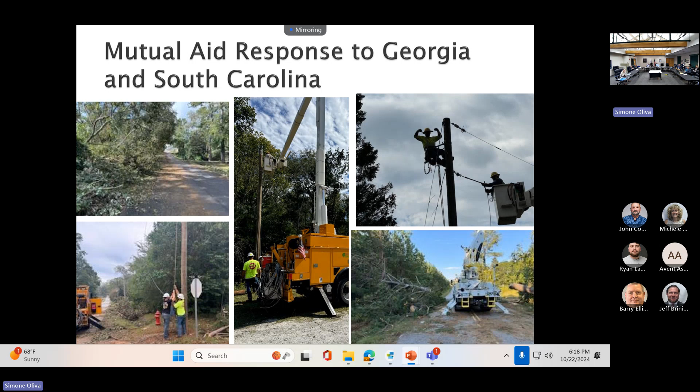So from there, they pushed up into McCormick, and all told, they were gone for about a week and a half. Once they were released, they got home around October 4th. And then on Sunday, as Jeff said, October 6th, we got another request because Milton was approaching Florida and Orlando Utilities Commission was looking for help. We go to the next slide. So again, we immediately volunteered. This time, Tony, Kramer and Jeff headed down. We were teamed up with 2 other NEPA utilities. All told, we pushed 15 crews into Orlando.

Tony, why don't you talk about your experience there? Yeah, so we got the call on Sunday morning. Jeff, Kramer and I came in, we got the trucks ready, and we met up with Julio and Boylston. And that was our crew. I went down as a supervisor. So we made the journey to Florida, took 3 days to get down there. And in Florida, it's all backyard pools. Between Julio, Boylston, and these guys, they all pulled together.

It's a lot of specific work. You can't get the bucket truck in, so they literally put spikes on, like you climb a tree. They climb the pole that way and work it. Very, very physical. Every backyard is lined with fences, and it's like a jungle, so you're going in and out, trying to find the problem. And then get it restored, and like Scott said, everybody was grateful. Everybody's nice to us, offering us water.

Let's go to Walt Disney World. No, I wish, but no. Not getting home next week. She give you a free pass.

Now, are these all municipal utility companies? They are. So this is the important part. These are all communities just like ours that we're responding to. This was NEPA's largest mutual aid effort since Irma struck the Virgin Islands back in 2017. All told, 48 utility crews and 114 personnel we pushed into communities just like ours. And the benefit we have of being part of this group is that these utilities will then turn around and help us during our time of need.

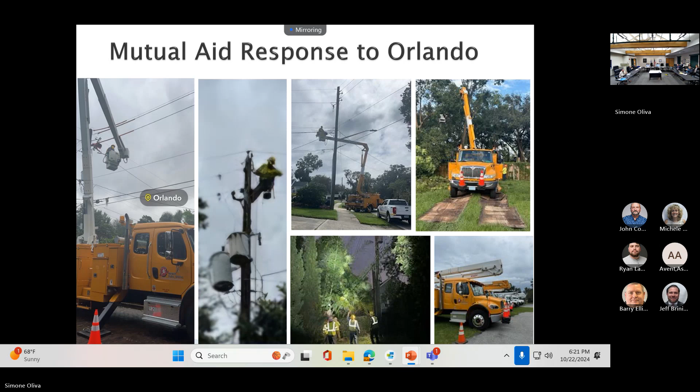Well, gentlemen, you're welcome to stay as long as you want, but you're also welcome to leave if you'd like.

All right, we'll move on to agenda item 7. We have 3 strategic discussions this evening. The first one is the natural gas construction schedule with Barry Ellison. Right. So Jeff, did you touch base if Barry's gonna do it online or if you're gonna cover it? He's doing it. Okay. Yeah, guys, I'm sorry, I don't see it up on the screen. It's not up on the screen yet, Barry. Okay. Put it up top.

This is just a kickoff of this project, and we'll have much more details as we get more involved, but we thought it was important that... Sorry, what do you mean, the natural gas construction schedule? Yes. Is that in the board drive? Is that somewhere in here? I'm not seeing it. Can we start with the other one? Yeah, why don't we stop then? All right, we'll move on to the 2025 board meeting schedule.

That's Chris Rhodes. Oh, that's an easy one. I love that. We already had the discussion on this, and just wanted to see if there's any modifications or changes needed for the board. I think it's consistent with what we've routinely done, and when we moved it, it's for a good reason, either near a holiday or near the NEPA conference. Okay. Did you want to talk about the strategic plan, Chris?

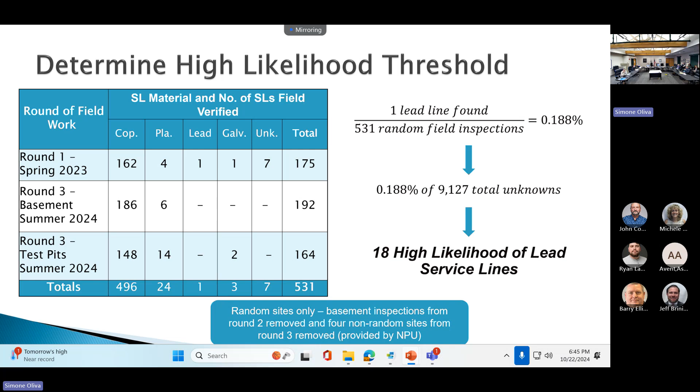So we're switching our modeling approach. And I have sort of this little graphic on the next page. It's like this big triangle. So the top 18, we think are lead, high likelihood of lead, but they're still unknown at this point. And then we use sort of a 3 times buffer. So we're saying from 18 to 52, that's medium likelihood of lead. And everything under that, the other 9,000 and change, are not lead.

They're copper, they're non-lead. And that's one of the EPA terms. When you categorize a line, it can either be lead, galvanized requiring replacement, unknown, or not lead. It's the only 4 things they let you do. And so now we're saying that we have a bunch of unknowns, and we have 9,000 not leads. So we're doing pretty good.

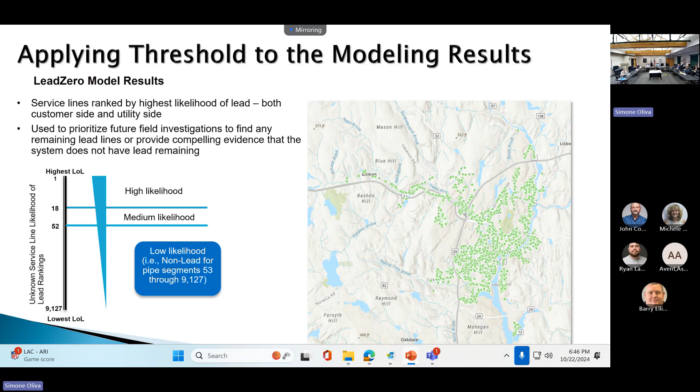So really quickly, how we did this was we took our GIS and we exported it. We scrubbed all the lead out, made it all unknown. We put in all the things that we knew were copper, and everything from the model that we said was not lead. And then we were still left with some unknowns. And then we did our field sampling where we knew we had confirmed lines. We put that in. Oh, sorry, next slide. Sort of step-by-step process of getting our inventory.

And then once we got the spreadsheet with all our 4 categories and all our lines identified, we had to upload it into the Connecticut template, which took a little bit of work. It's not the easiest template to work with. And then we did submit the inventory to the state on the 16th of October.

And in summary, what it turned out to be, on the next slide, and it's good that out of our total number of service lines, which is 11,086, we have 10,896 non-lead, 12 lead, 1 galvanized requiring replacement. What that means is at some point there was a lead line upstream of that. And we have 176 unknown lines, and everything else is good.

So what we have to do now for our next steps is we have to send all these people letters. And I actually have copies of the letters if anyone wants them. We have to send out different letters to each person. So if you have a lead line, you get a letter that says you may have a lead line. That's all it says. If you have a galvanized, same thing, you have a galvanized requiring replacement line. If it's unknown, it's a little bit longer. It says you have an unknown line and we give you some instructions on how to test it, or we will go out and test it if you want.

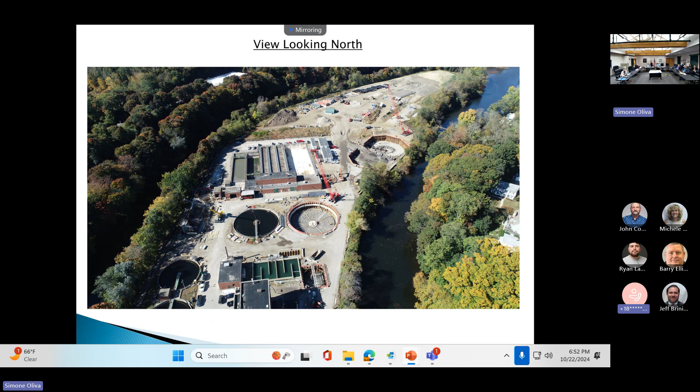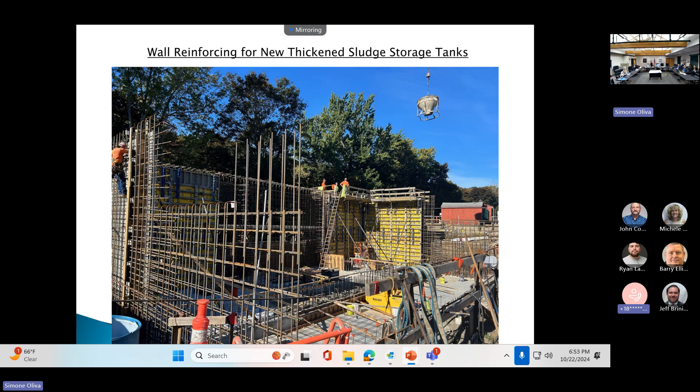That's the sludge thickening and sludge storage building, in the back of the slide, just to reference where it is, kind of in the shadows over here. So that's a brand new building, a new process. You can't get rid of digested sludge anymore, so we'll have to do liquid sludge. And like I said, there's a lot of steel. Next picture. There's actually a wall now. That's the first thing that's actually come up out of the ground. It's a slow process, but they are pouring a lot of concrete every day.

That is clarifier number 2. You can see the formwork around here. They'll be pouring a pretty big base slab, all sloped down, for that clarifier early next week. So that should be online by early spring is what they're saying.

If you look at that in scale, you can see 2 bodies. Point to where the guys are standing. Yeah, you can see this. Some of these guys are 6 feet tall. I mean, it's pretty deep in the ground. It's big. It's a big hole in the ground, for sure.

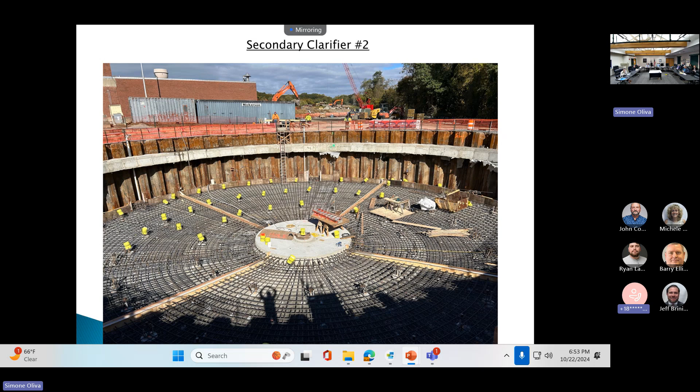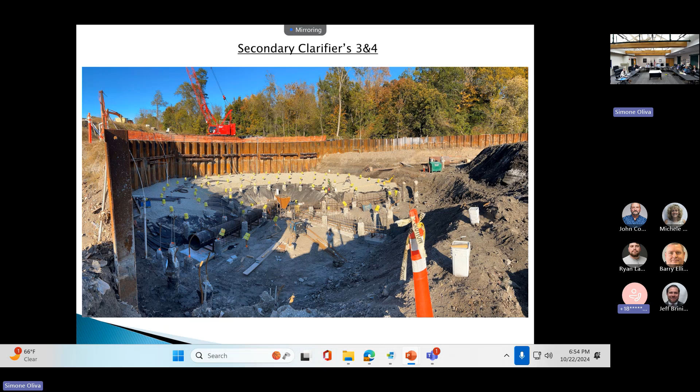Next slide. That is clarifiers 3 and 4. You see that it's a 36-inch pipe, which brings the sludge in. There's other pumps that pull the sludge back out. You can see the black soil. That's the stuff they still have to get rid of. They're stockpiling it slowly. To be honest with you, I don't know where they're actually taking it. There's a lot of lead in that soil.

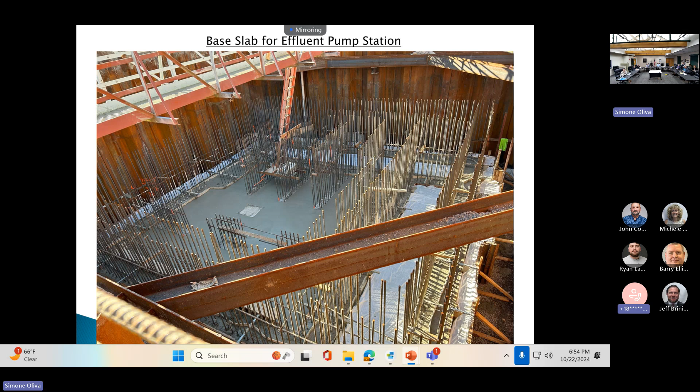Next slide. This is the effluent pump station. They just poured a base slab, and then all the walls will be starting to be poured as well. So that's the moving part. And the next slide is a corner of the UV disinfection system. They put the piles in. Now that we don't use chlorine in the off season, this whole tank is going to get ripped out very shortly to start building the UV disinfection system.

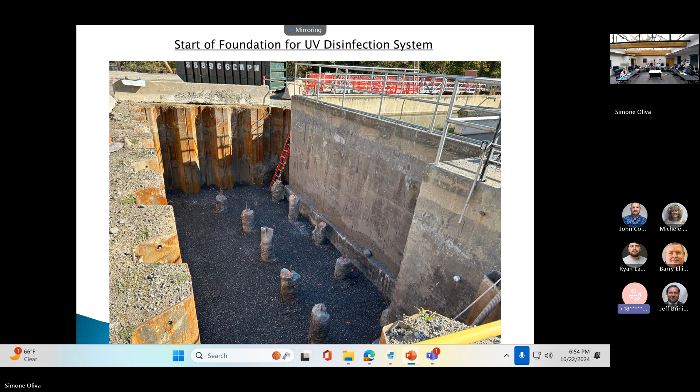So, honestly, I did a 3-month look ahead, and it's really just concrete and rebar. There's no other way to say it. The slowest part is demolition of the admin building. They're waiting for parts for the wireless bridge. It should be early November. There's a little bit of lead; some of the windows have been remediated. Otherwise, the building would be coming down, according to the contractor, well before Christmas. That's their plan. You happy with Nickerson?

They're doing a great job. They brought a lot to the table for value engineering. I would say it's like 1.7 million less than the contract value. There's been over 30 change orders submitted, reductions and add-ons, and the total change order was $14,000 on a $162 million project. They bring a lot to the table, because it's quicker for them to build with different solutions, and a lot of cost saving measures. They're good to work with at the moment.

Can they pour concrete in the winter? Absolutely. Depends on how cold it is. If it's a super thick pour, they've got to keep it with blankets, so they don't drop too much. But if it's too hot in the summer, you've got to insulate it too, because it's a chemical process and the concrete gets so hot inside. With super thick walls, you've got to be real careful. There's no problem with the liquid sludge being in contact with the concrete? No, they'll coat it on the inside, but it's all organic still. It's okay.

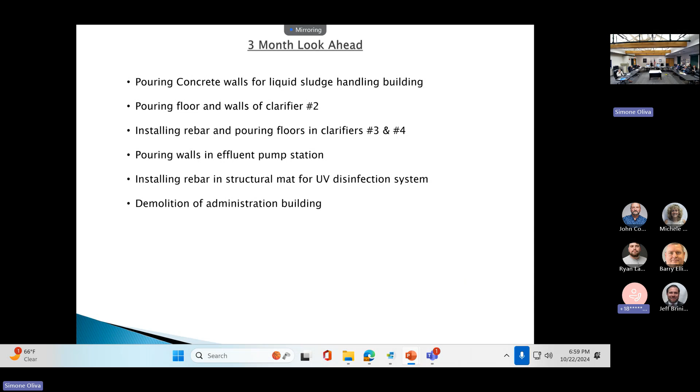So again, just so I understand the timing, when should I put on my bathing suit? 4 years. Give it a solid 4 years. Things will be improving incrementally, Bob, but it's really when the whole system comes on board that it will have the max impact. Okay. And that's 4 years. Yep. Like I said, we're a little over a year in, but a 5-year project's about right. There'll be some hiccups at some point. All right, great. Thanks, Larry.

All right, well, all that being said, all we have left is executive session. I will entertain a motion to go into executive session. I have a quick question on the sewer service rates. So when there's an exceedance of BOD or suspended solids, what kind of cost is that? We haven't had any since we put the new rates in place. Have we, Larry? Any exceedances? None that I know of. Okay, good. Back in the day when we had Federal Paper Board or Cascades, there were exceedances, and that's one of the reasons we had to start making these changes in our regulations. Put a little force into it. All right, thank you, Bill.

All right, well, with that, I will entertain a motion to go into executive session. So moved. Thank you, Robert. Second, Bill. Any questions or discussion about going into executive session? Hearing none. All those in favor say aye. Aye. All those opposed say nay. Any abstentions? The motion carries. We are in executive session. Chris, would you like to stay behind? We'll have Chris, Jeff, Steve, and Simone for the first part, and then we'll let them go. I'd like Hugh Murray, our labor attorney, to be here for the entire session.